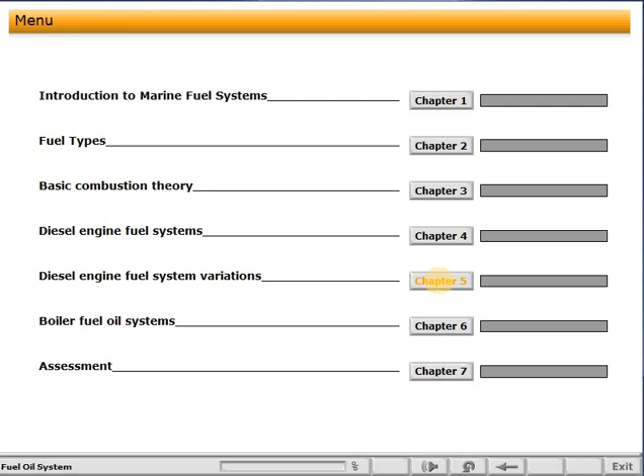The learning objective of this chapter is that the learner will be aware of the alternate fuel systems for marine diesel engines.

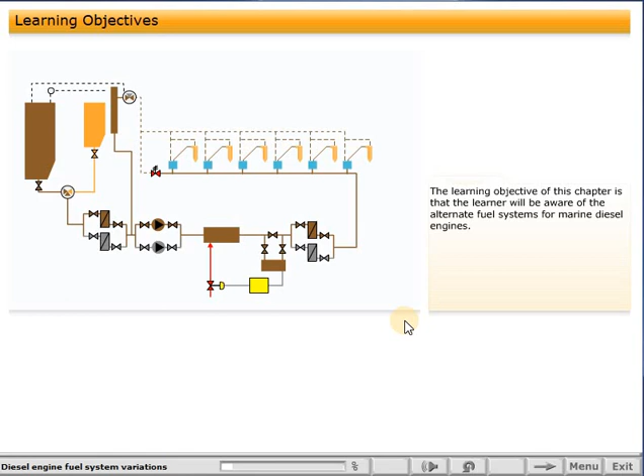In the previous chapter, we looked at conventional fuel systems for diesel engines and considered common variations, such as variable injection timing. Now we will briefly look at other variations you may come across on vessels you sail on. We will not go into detail, only give an overview. You should study the manufacturer's instruction book for details of the actual systems when you sail with them.

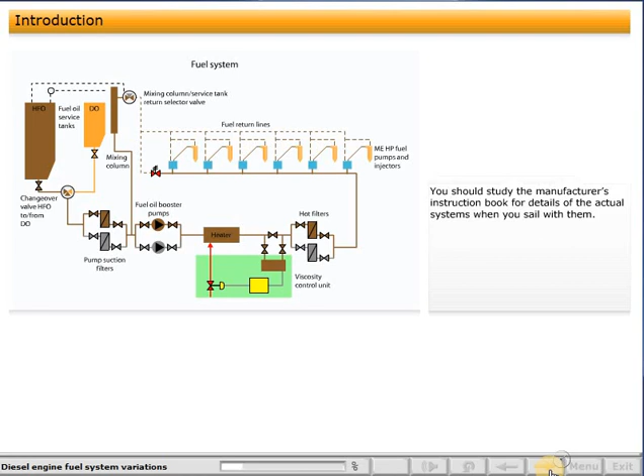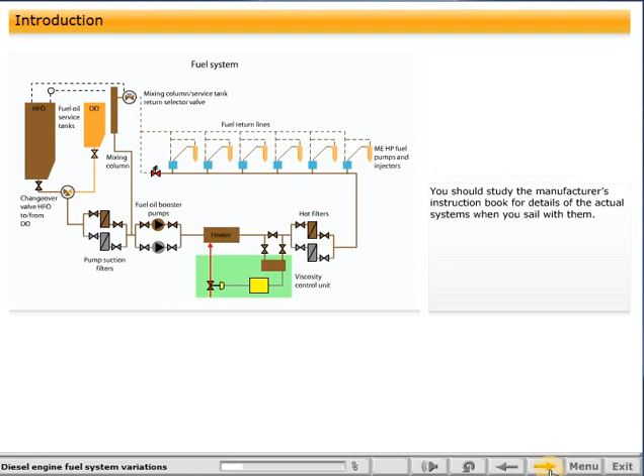Many auxiliary engines are designed to operate on fuels other than clean distillate fuels. Residual fuels are, however, not always suitable, particularly when running on low load due to ignition and combustion quality issues. A number of inline fuel blending systems have been developed which allow diesel engines to operate on a mixture of distillate and residual fuel, while avoiding the storage problems sometimes encountered with fuel mixtures.

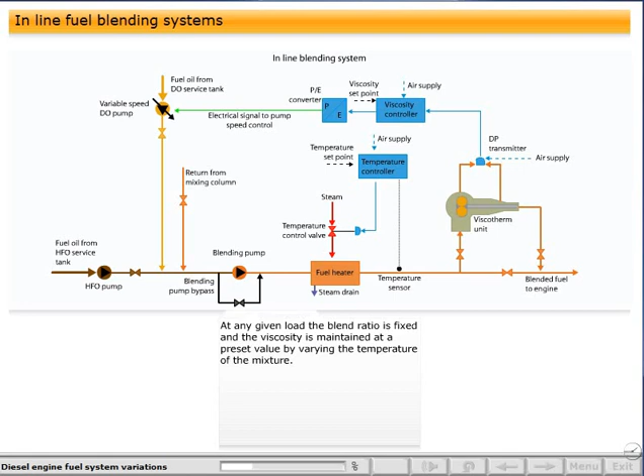Another method of control is to give the blend component ratio a load-dependent preset value, which varies throughout the load range. At any given load, the blend ratio is fixed and the viscosity is maintained at a preset value by varying the temperature of the mixture. The temperature will be low for blends with a high percentage of distillate when the engine operates on low load, and high when it operates on high loads with only a small percentage of distillate in the blend.

Inline blending can also be used to control the fuel's sulfur content by mixing high and low sulfur fuels to obtain the desired sulfur content of the blended product.

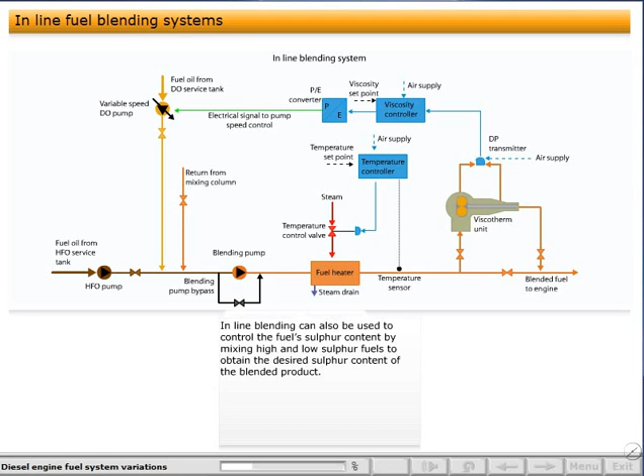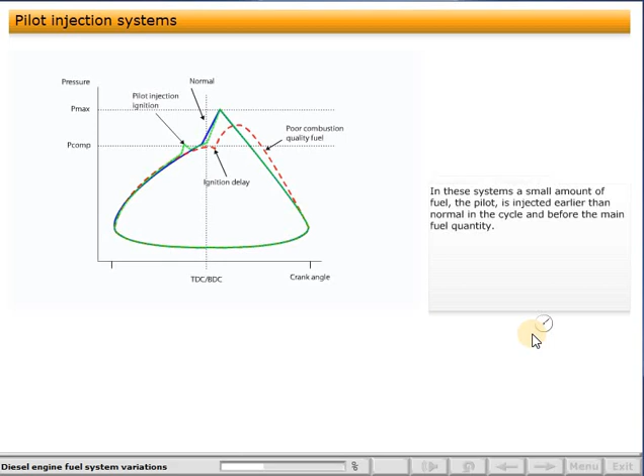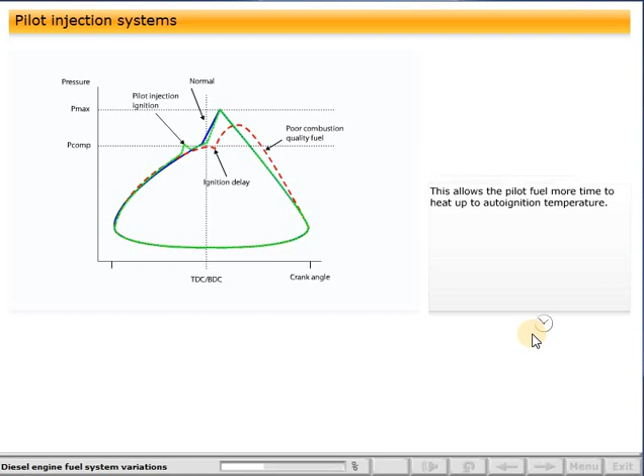In order to overcome ignition delay problems with fuels that also have poor combustion quality, which may result in a low and late peak pressure, some systems are designed with pilot injection. In these systems, a small amount of fuel, the pilot, is injected earlier than normal in the cycle and before the main fuel quantity. This allows the pilot fuel more time to heat up to auto-ignition temperature. Once ignition takes place and a flame is established, the cylinder temperature rises and it is easier to ignite and combust the main fuel charge with minimum ignition delay.

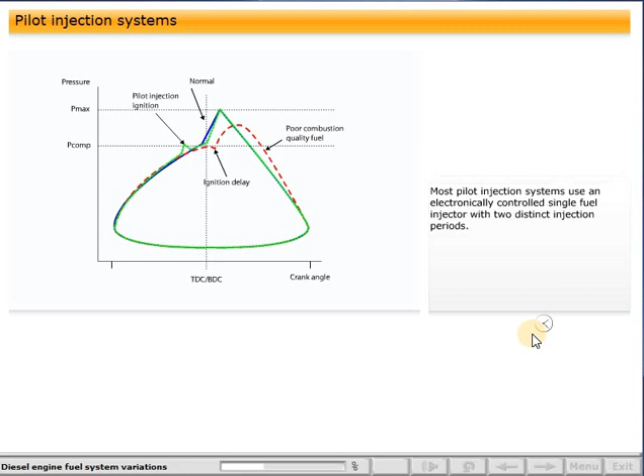Most pilot injection systems use an electronically controlled single fuel injector with two distinct injection periods. Pilot injection is also used for dual fuel diesel engines and is described later in this chapter.

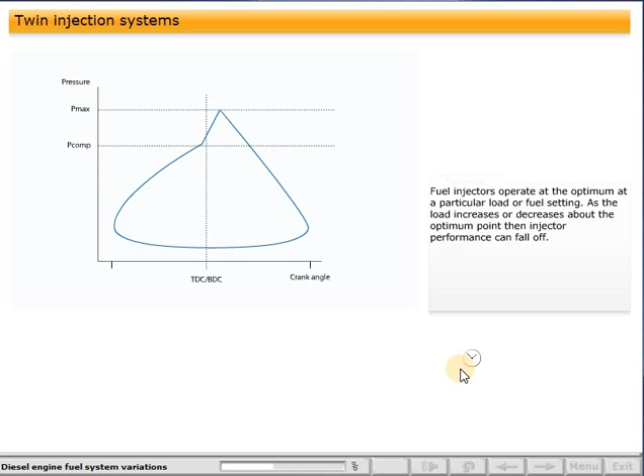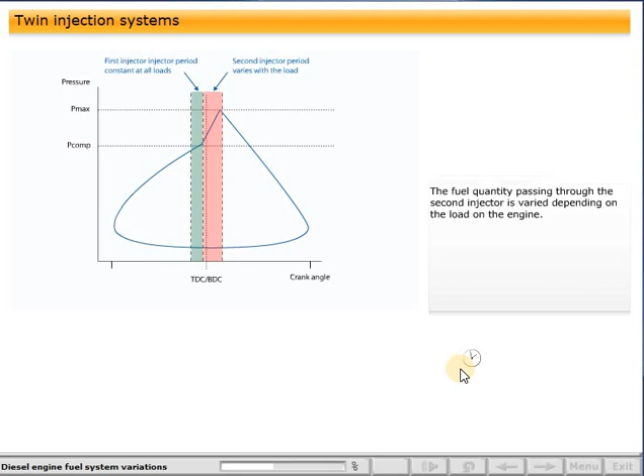Fuel injectors operate at the optimum at a particular load or fuel setting. As the load increases or decreases about the optimum point, injector performance can fall off. In twin injection systems, one of the injectors operates at full capacity at all engine loads, giving an amount of fuel just less than that required for minimum load running. The fuel quantity passing through the second injector is varied depending on the load on the engine.

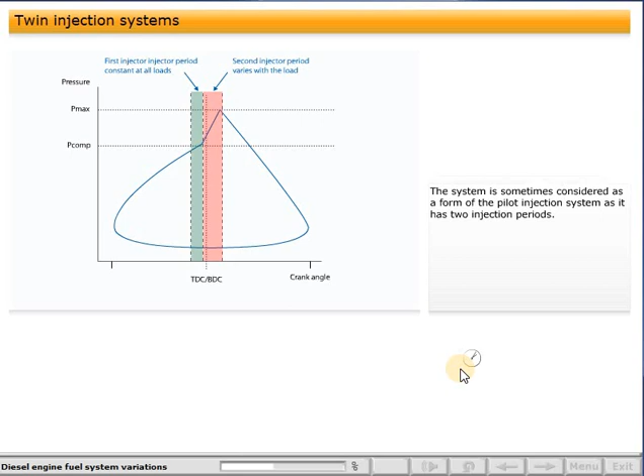The fixed fuel quantity is injected into the cylinder by the first injector, followed by the varied quantity from the second injector. The system is sometimes considered as a form of pilot injection system, as it has two injection periods. However, it operates with normal fuel timing and optimized injector performance from the first injector, rather than early injection of the pilot fuel to improve ignition and combustion.

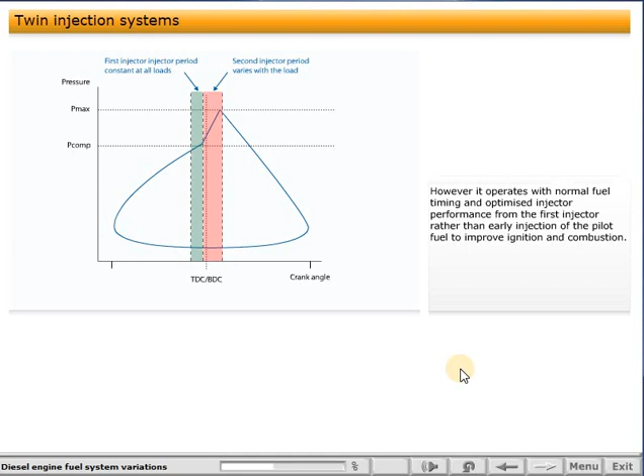The rapid increase in LNG trade by sea has brought with it an urgency to develop dual fuel systems for diesel engines, which allow the boil-off gas from the cargo to be used as fuel. These systems have now been introduced, and there are an increasing number of dual-fuel diesel engines now in operation. The tightening of environmental regulations has also resulted in the use of dual-fueled engines on some ships which do not carry gas cargoes, as lower NOx, SOx and carbon dioxide emissions result from using gas fuels.

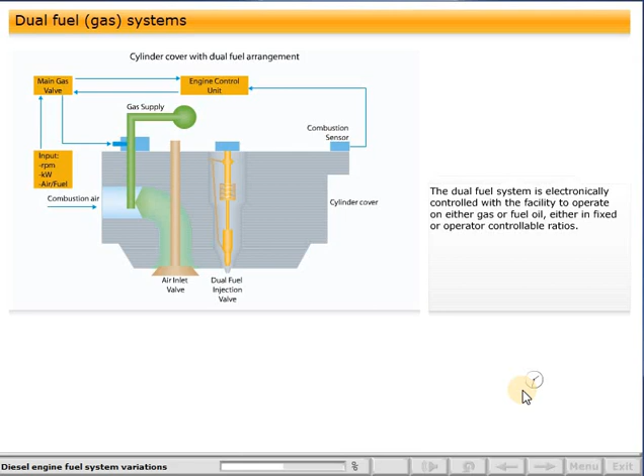The dual-fuel system is electronically controlled with the facility to operate on either gas or fuel oil, either in fixed or operator-controllable ratios. Inputs from the engine for speed, power, combustion quality and the air-fuel ratio are fed to the engine control unit. The output from this unit controls the fueling rate to give optimum conditions, including efficiency and exhaust emissions.

Different engines operate in gas mode in different ways. In one system, the combustion process is initiated by injecting a light fuel oil as a pilot fuel, followed by injection of high-pressure gas into the cylinder.

In another system, gas is added to the inlet air at low pressure, with the combustion process started by injecting a light fuel oil into the compressed gas-air mixture through a fuel injector. In fuel mode, the fuel system operates as a conventional system with electronic control.

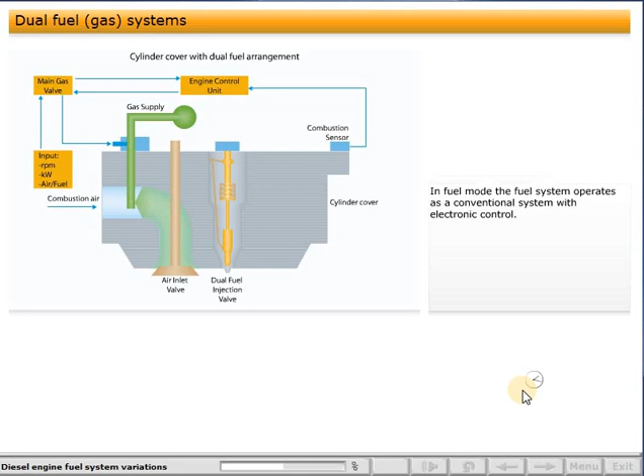The use of fuel emulsions has been reintroduced in some recent engine designs as one method of reducing the NOx level in exhaust emissions. NOx production from a diesel engine is dependent to a large degree on the maximum cycle temperature and the length of time that it is maintained during combustion.

By introducing water into the combustion process, the maximum temperatures are reduced, so reducing the amount of NOx produced. This, however, can reduce engine efficiency and lead to an increase in specific fuel consumption. Fuel emulsions can also reduce the effectiveness of cylinder lubrication.

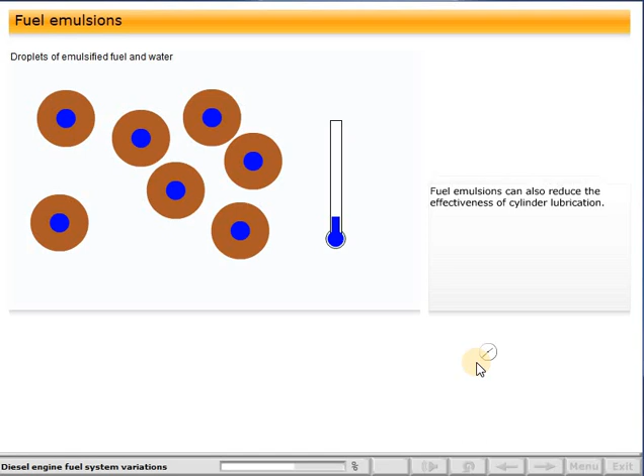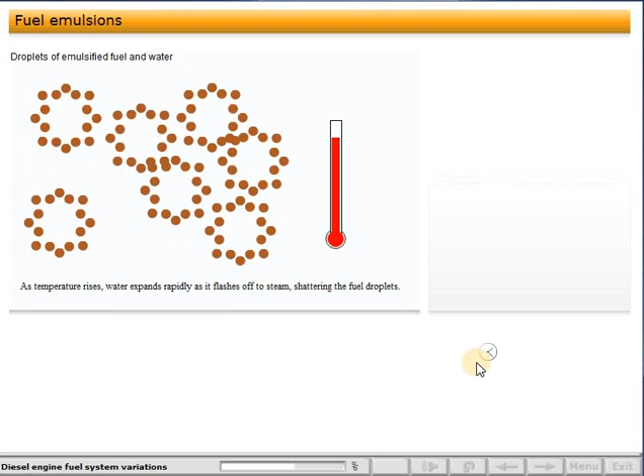One side effect of using emulsions with very poor quality heavy fuel oils is that the water in the emulsion flashes off into steam in the engine cylinder. The rapid increase in volume during this change of state can aid atomization and improve combustion efficiency.

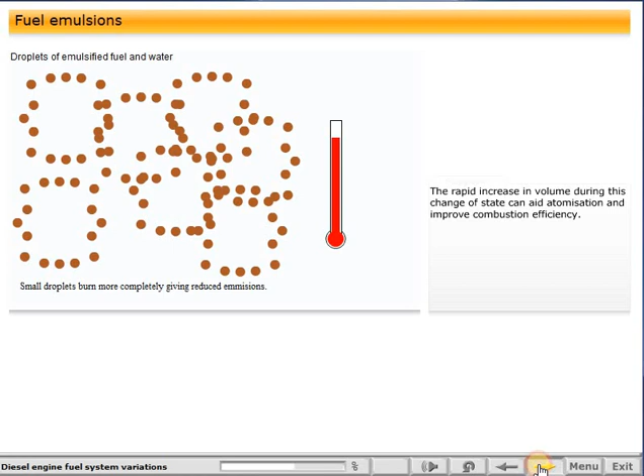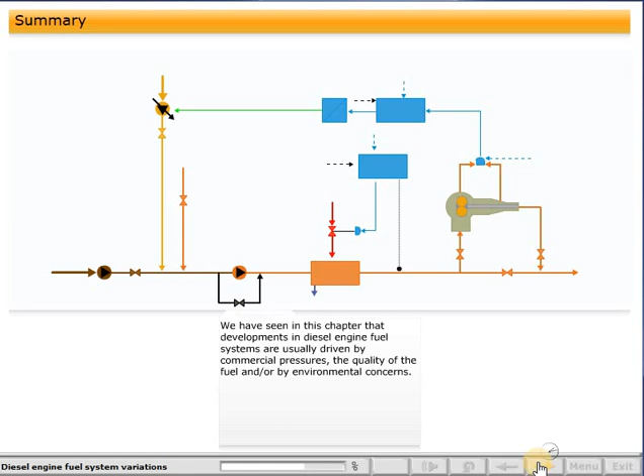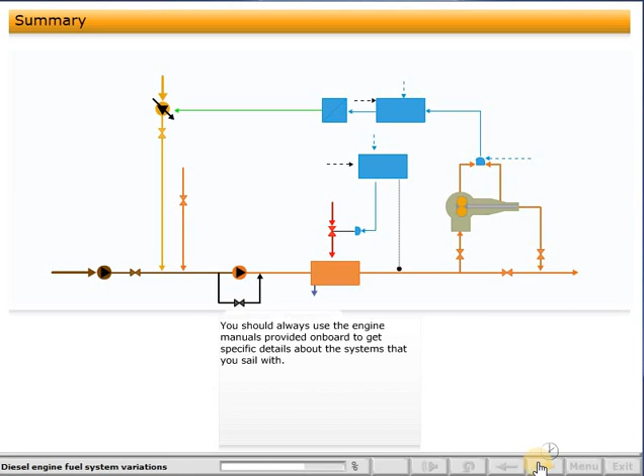We have seen in this chapter that developments in diesel engine fuel systems are usually driven by commercial pressures, the quality of the fuel, and/or by environmental concerns. We have looked briefly at a number of developments, all of which you may come across on vessels that you sail on in the future. You should always use the engine manuals provided on board to get specific details about the systems that you sail with.

Try the questions in the following self-test to check your understanding so far.